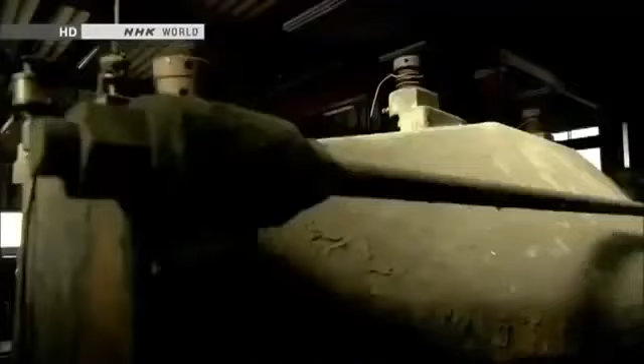In a workshop near Mount Fuji, a curious being has appeared. It's 3.8 meters tall and weighs 4 tons. It is a giant humanoid robot named Kuratas.

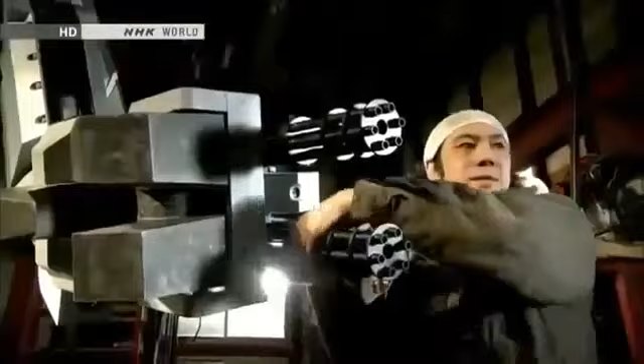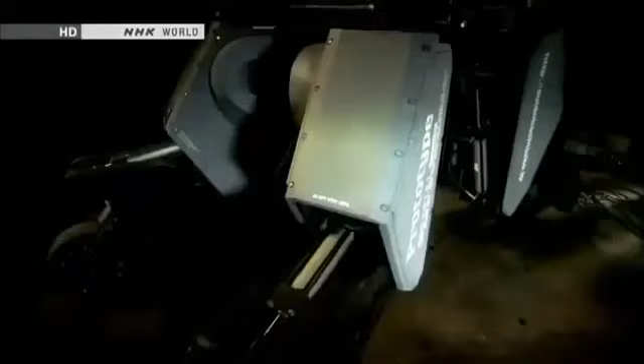Kuratas is a contemporary artist's creation. He holed up here for 2 years, building the robot with input from an expert. He calls Kuratas a work of art, but it's a sophisticated piece of machinery. A person seated inside can control the robot, move its limbs, and grab things. The artist says he was inspired by robots in science fiction tales and animation. That vision sustained him as he worked in solitude.

Things that were once unthinkable are becoming real. How will robots evolve? Well, military applications could be one option. They'll probably become more and more like humans. They could surpass us in strength and ability.

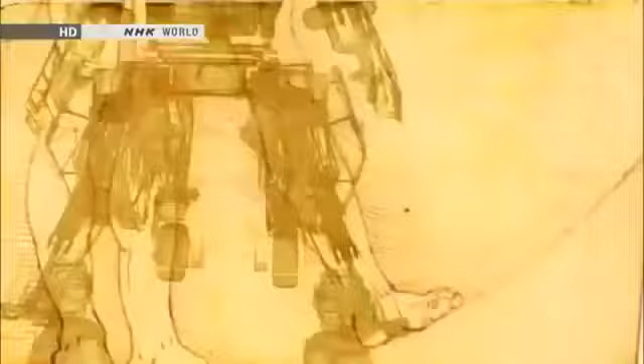People long dreamed of creating these extreme machines. Now, humanoid robots are here. They think like we do, move like we do, and even sacrifice themselves for us.

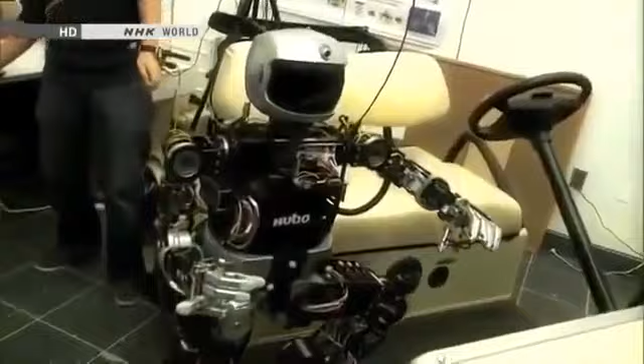We want our robot to change society, because robots must be useful. Electronics and computing, progress in vision systems, there are many pieces of it. We will see much more capability continue to grow.

Since the Industrial Revolution, people have entrusted some jobs to machines. But there may come a day when humanoid robots do much more complex jobs. Then, what will people do? You'll see more and more robots doing things in society, whether it's manufacturing, service applications, or home healthcare applications. The key will be to skillfully divide labor between humans and humanoid robots.

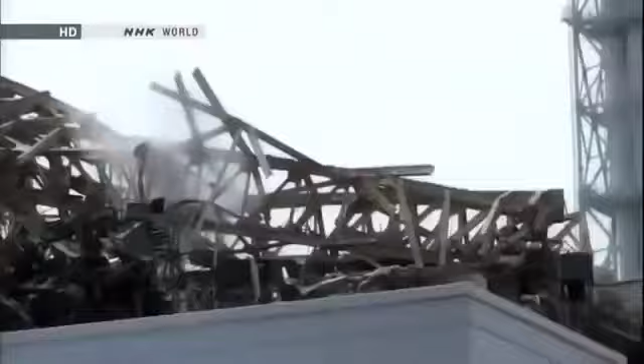The disaster that hit Japan in March 2011 accelerated efforts to develop robots with human traits. The Fukushima nuclear accident left people powerless. Robots can take over when things become dangerous.

They can plow through rubble, climb ladders, even make repairs. People are turning to humanoid robots to handle all of these tasks. We're eager to launch it soon to end the crisis. By joining forces, we can make a truly useful contribution. Only a humanoid could do it.

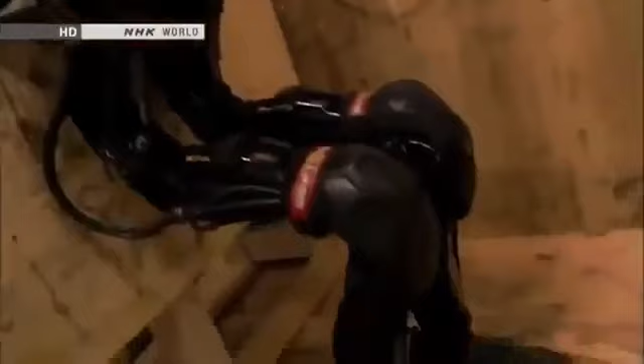The day will come when robots will really assist mankind. The nuclear disaster in Japan sparked explosive advances in humanoids at the front line of robotics development. This program explores the future that's fast approaching.

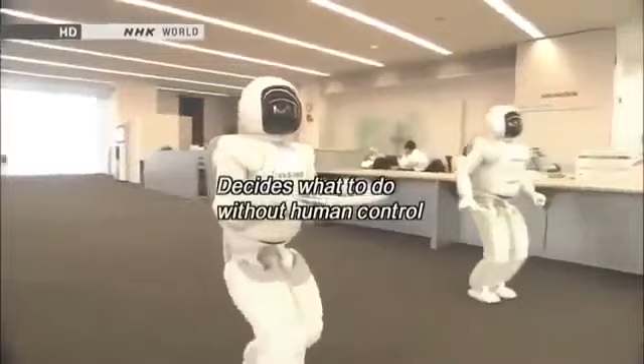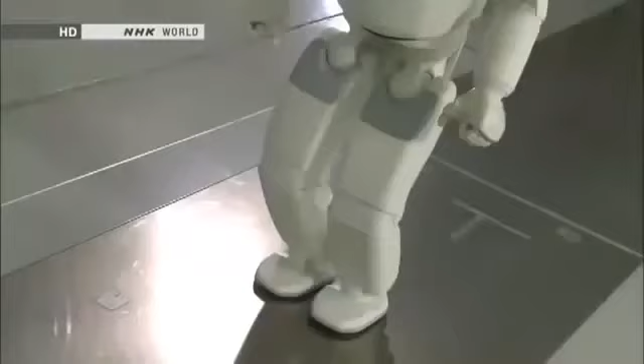Asimo was created by Honda's research and development subsidiary. We were allowed to film their top-secret robotics laboratory. Japan is a worldwide leader in the development of humanoid robots. Asimo is the country's crowning achievement. Engineers continue to make improvements.

Asimo's most innovative feature is its advanced intelligence. The robot can think and act on its own without human intervention. That's made possible by sensors that replicate our 5 senses. Asimo's head contains 8 microphones, which it uses to listen and engage in conversation.

2 cameras work as eyes. They can detect humans and use stored data to identify them. A facial recognition problem? I don't think so. Please cover your face.

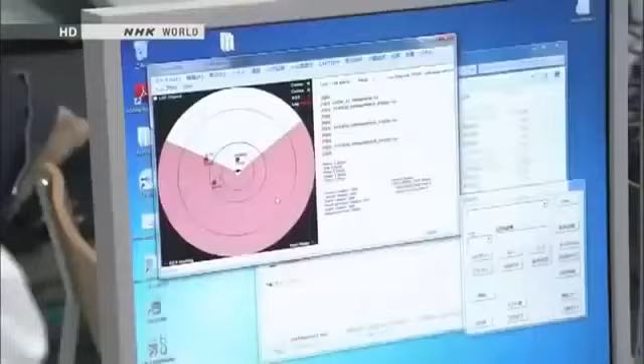Asimo's artificial intelligence analyzes a vast array of information. That's how it understands people's requests and takes appropriate actions.

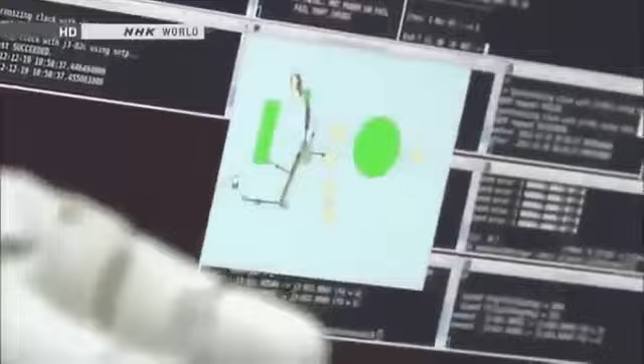Asimo also has a sophisticated sense of touch. Its fingers can make subtle movements, like a person's. Sensors are embedded in the fingertips, too. They can gauge the hardness of an object, like human fingers do.

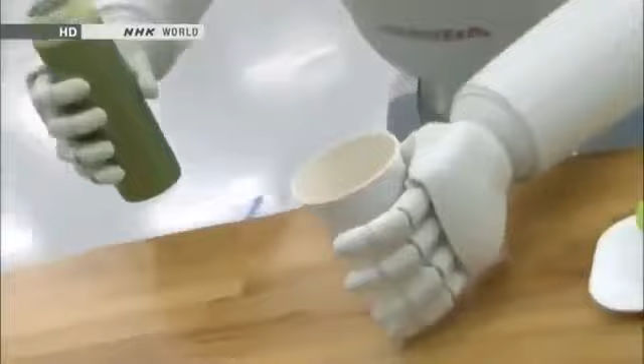Most robots use a fixed amount of strength to grab things. But Asimo exerts more power to open a tightly sealed water bottle and less when holding a paper cup. Its artificial intelligence uses information from the fingertip sensors to adjust the grip.

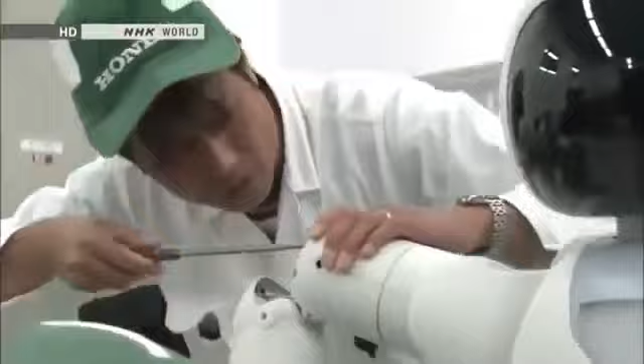The developer's ultimate goal is for Asimo to be a valuable partner that coexists with humans. The engineers who created Asimo all grew up watching animated shows about robots, such as Astro Boy, Doraemon, and Gundam. They dreamed of someday making their own.

Satoshi Shigemi is the development team's leader. He has been designing robots for the past 16 years.

From the beginning, we wanted to design a robot that could help people. To realize that dream, we're constantly asking ourselves, what kind of robot would be able to change society, make people happy, and make life easier for people around the world? Our idea is to create a robot that will change how people live. We're working through the technological issues, one by one, in order to reach that goal.

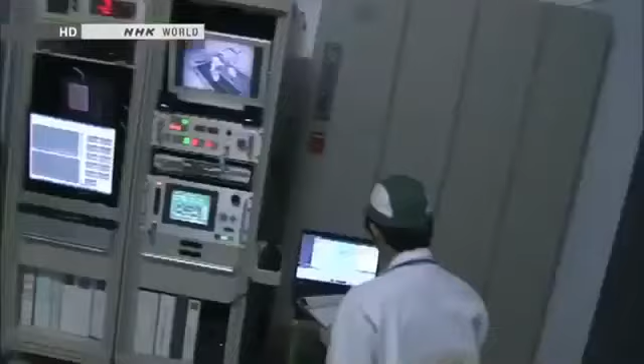Asimo's advanced physical capabilities are revolutionary. The robot can walk and run. It can reach speeds of up to 9 kilometers an hour.

For robots, walking is much easier than running. When running, both feet momentarily leave the ground. Balancing in mid-air is no easy task.

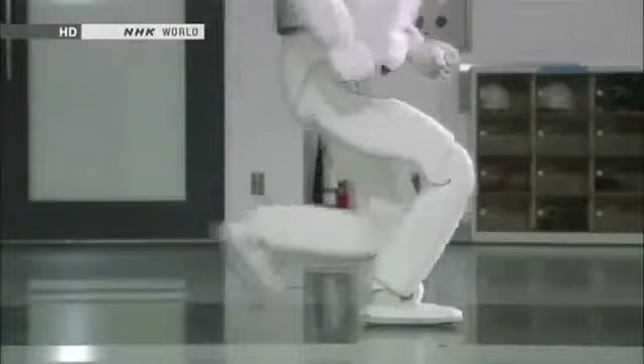Maintaining posture while jumping or floating in the air was a major technological breakthrough. Asimo leans its upper body slightly forward to maintain overall balance, going forward straight in the air. Sensors in Asimo's waist measure the robot's angle, and it leans slightly to compensate, forward or back, side to side. That's how it stays perfectly balanced in the air.

Asimo has been evolving ever since development began in 1986, much like a growing child.

But something happened that made researchers realize Asimo's real-world limitations. It was the accident at Tokyo Electric Power Company's Fukushima Daiichi nuclear plant. The damaged reactors released radioactive substances, making it difficult for humans to deal with the crisis. People needed something that could confront the dangers and bring the plant under control.

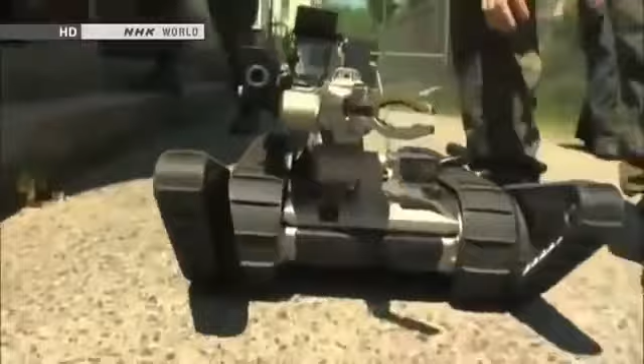Robots. Japanese officials sent a request for robots developed by the U.S. military. The robots were sent to Fukushima in April 2011. They recorded images inside the damaged reactors.

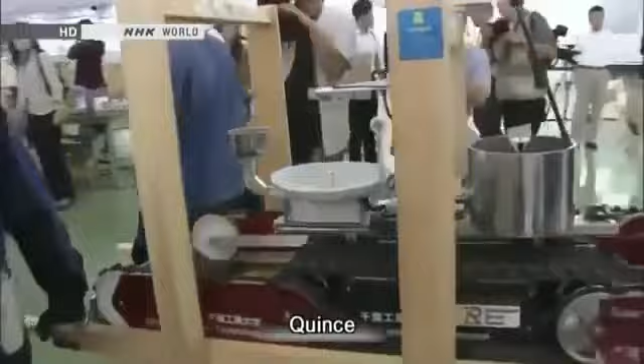Since then, a variety of Japanese robots have been enlisted as well. Robots have proven to be useful, but 2 years after the accident, they're only used for inspections. They're not able to do all the work of humans.

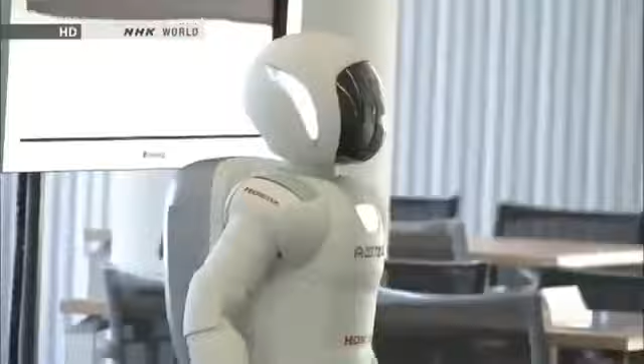What about Asimo? Right after the disaster, people flooded Honda with phone calls and emails asking the company to send Asimo to the Fukushima plant. But Asimo wasn't up to the task. It could move nimbly over an office floor and other flat surfaces, but large vertical gaps and obstacles were a different story.

We heard from many customers. We ourselves regretted that Asimo couldn't be of help. It was obvious that the Asimo we had built wasn't ready for real-life action. We realized right away that we needed to make something different, something new that could offer immediate assistance.

Honda wasted no time. Company officials offered to create a robot free of charge to assist TEPCO in the recovery. TEPCO accepted. Officials asked for a robot that could open or close valves inside the nuclear plant.

We wanted to flush out radioactive materials that remained in the pipes and bring down radiation levels in the facility. That was our first goal. Unless we opened or closed the valves, the area would remain highly radioactive, and that would prevent workers from entering the facility and impact the entire decommissioning schedule.

How many valves are there? Each unit has from several thousand to tens of thousands of them.

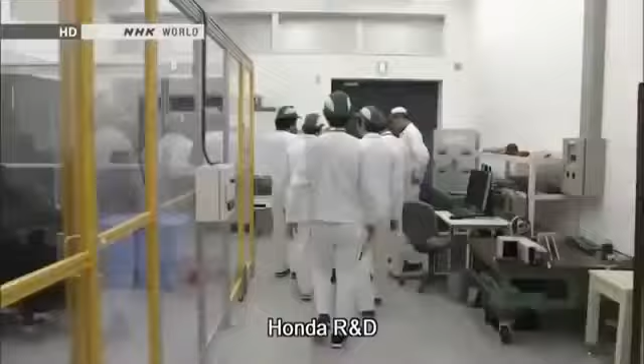In July 2011, 4 months after the accident, Honda began designing a robot for use at the nuclear plant. Members of the Asimo team were put in charge of the project. A humanoid robot would take too long to build, so engineers focused on making a robot specifically for operating valves.

Asimo was crucial to their efforts. Its ankles employ advanced balancing technology. Developers reasoned that using it would allow the new robot to work inside rubble-filled reactor buildings.

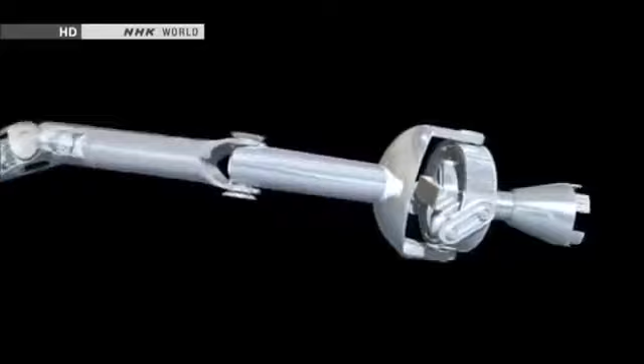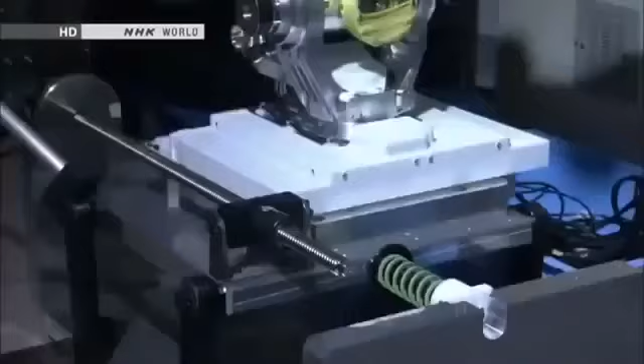The team worked exceptionally fast, completing a prototype in just 4 months. They turned Asimo's leg into an arm for operating the valves. Even when the base moves, the arm remains steady. So far, so good.

Officials from TEPCO evaluated the prototype at the National Institute of Advanced Industrial Science and Technology. The government-backed group for cutting-edge research contributed to the development effort.

A TEPCO official couldn't take his eyes off the robot's movements. We may be quite demanding. That's okay. We might be quite direct. The test is designed to replicate conditions inside the nuclear plant.

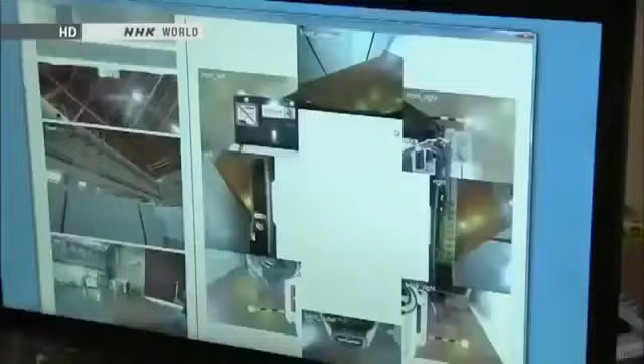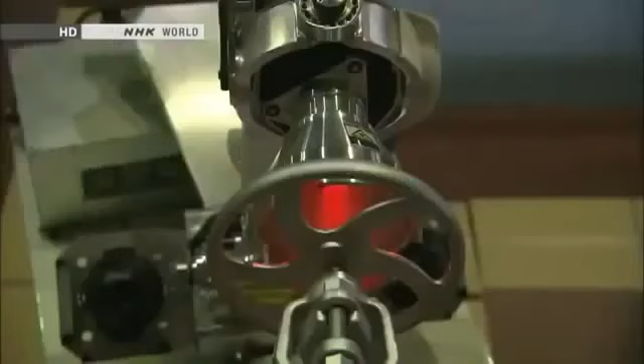The robotic arm is remote controlled. Testers send the arm toward one of the valves. There are a number of unknowns, including the condition of the valves. They may have rusted since the accident. A valve might break if the robot applies too much force, or it might not budge at all.

The robot uses just the right amount of force and turns the valve on the first try. It's passed the test. This robot can do more than inspections. It could help in the recovery effort.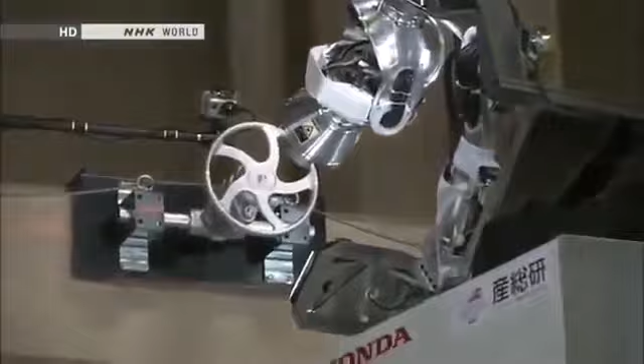From what we've seen, the robot seems near perfect. We want to use it as soon as the need arises. It's important that we quickly do what we can to make that possible.

The Fukushima accident also encouraged U.S. developers to design emergency response robots. Department of Defense officials have spearheaded the effort. Before, they had shown little interest in humanoid robots. Now, they view them as vital for disaster response. The architect of the new strategy is Gill Pratt of DARPA. He oversees funding for leading-edge research at the Department of Defense.

There are many aspects of disaster response in Fukushima that inspire people in robotics to work on new capabilities. If they were able to take action during those first 24 hours, then the first reactor maybe would not have blown up in an environment that is too dangerous for a person to do. What's important to us is that the robot is compatible with human environments, compatible with human tools, and also compatible with human operators without special training.

As a result of that, the easiest form that comes to mind is the human form. DARPA is backing the development of a humanoid robot for catastrophes, such as nuclear power plant accidents.

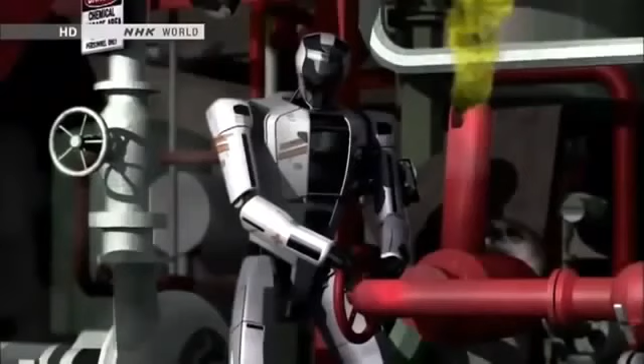Why the sudden interest in humanoid robots? Traveling over debris, prying open valves, using tools for repairs. Performing multiple tasks like these is impossible for specialized robots. Crises also require robots that can navigate doors and stairs. Humanoid robots are ideally suited for such situations.

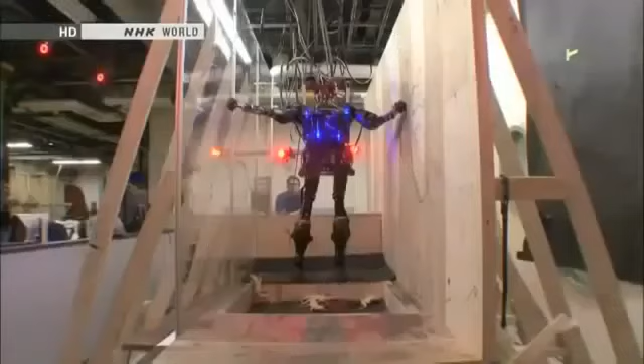Tests of this prototype were going smoothly. It can easily climb stairs and jump from a height of nearly 1 meter. It can negotiate obstacles using its arms and legs. It can already handle more demanding environments than Asimo can.

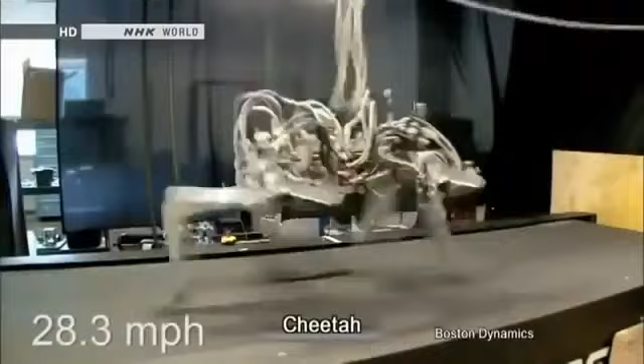Atlas is loaded with technologies originally designed for military robots. A quadruped robot called Cheetah can race through a battlefield at 45 kilometers an hour. LS-3 is for transport. It can carry heavy supplies for soldiers.

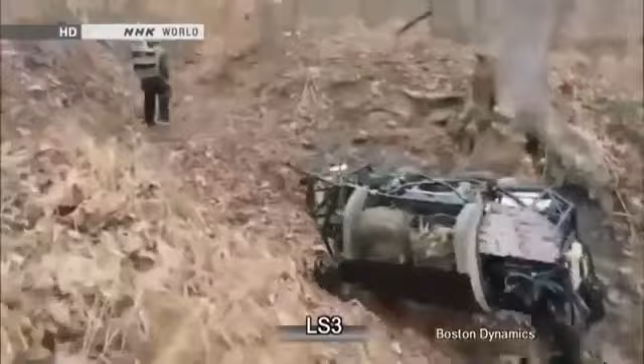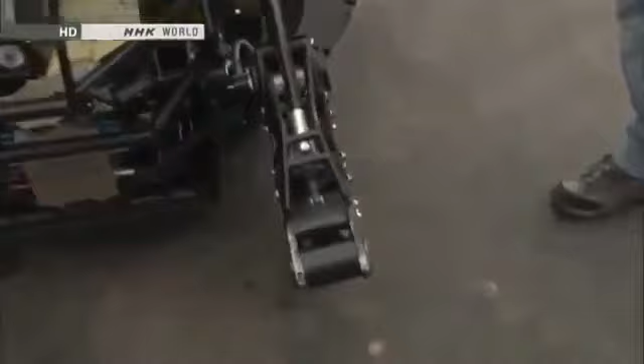The ferocious-looking robot gets its strength from a powerful hydraulic drive system. A hydraulic device can be small, yet quite strong. The black cables convey hydraulic power to the legs. That generates the brute force required for harsh conditions on the battlefield.

A web of hydraulic cables covers Atlas's body. They form a muscular suit of armor for clearing debris.

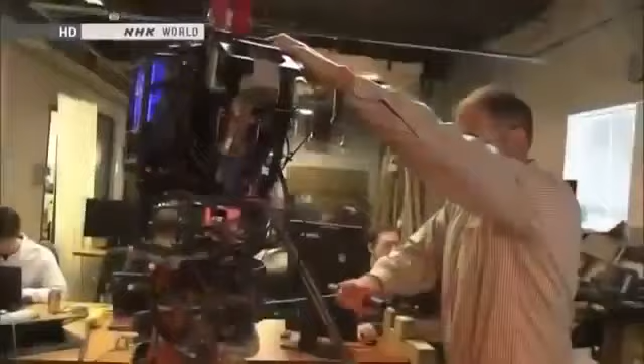Another important technology comes from military robot engineering. This machine's joints have a wide range of motion. They allow for flexibility that humans can't achieve. Atlas's joints are capable of moving in 28 different ways. Atlas can crawl through narrow spaces and withstand sudden shocks.

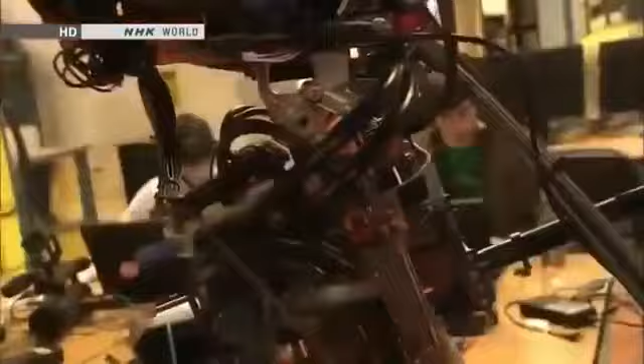But then we have the knee. This has 3 in the hip, just like us. This way, and then this way. I am very impressed with the number of degrees of freedom. It will be able to do these human-compatible tasks without a lot of the limitations that other robots have.

Engineers will combine Atlas's rugged body with sophisticated artificial intelligence that's almost near completion. They aim to complete the robot by December of next year.

One reason you see humanoid robots is because there's some people working who are really interested in robots as an entertainment thing or as a performance thing. I think that's different. We're much more interested in basic capabilities for emergency response, rescue. So I don't think Asimo has been designed to do those things yet.

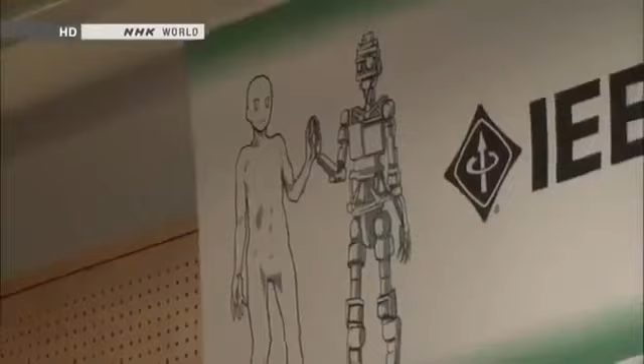U.S. engineers stepped up their efforts to develop humanoid robots after the nuclear accident in Japan. Japanese researchers are embracing the same mission. In November 2012, robot engineers from around the world gathered in Osaka for an international conference on humanoids.

Gill Pratt from DARPA was one of the participants. He came to invite engineers to join a project sponsored by the U.S. Defense Department. Okay, March 11th.

After 24 hours, if only a robot had been there to go and open that valve, the entire disaster could have been averted. But we didn't have one. And furthermore, we didn't have anyone that could do the job. So shortly afterwards, we actually started planning the DARPA Robotics Challenge.

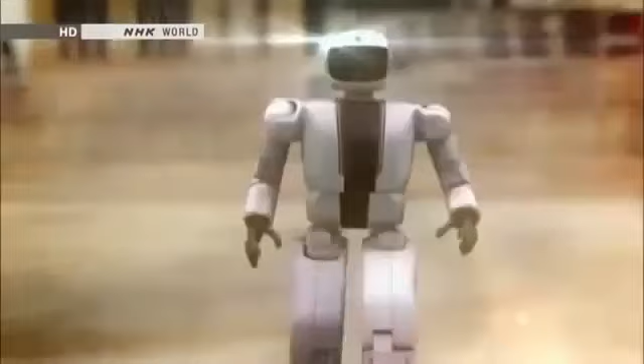The challenge consists of 8 tasks: driving a vehicle to approach a disaster site, walking over rubble, removing obstacles, opening doors, using tools to break down walls, climbing ladders, turning valves, and making repairs.

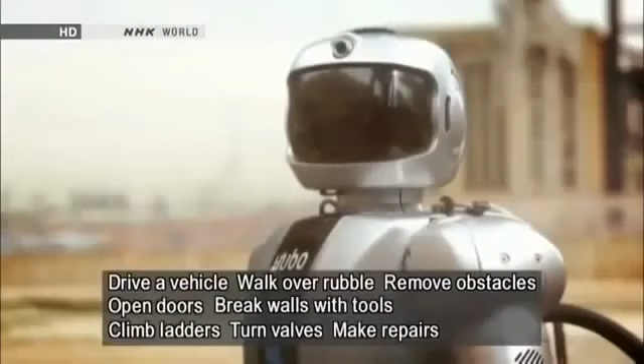A single robot must complete all 8 tasks. The development period is 2 years. DARPA will provide contestants with funding of up to $4 million.

DARPA has received over 100 proposals from research groups worldwide. They include renowned organizations like NASA and MIT. Japan is at the forefront of humanoid robotics engineering, yet its researchers hesitated to throw their hats into the ring.

So actually, to me, it's difficult not to see that some of the results of the DRC are going to be used to advance, as you say, advanced military technology. The DRC is about developing robots that I believe wholeheartedly are completely impractical for military purposes, for offensive military purposes. Will the technology that we come up with find its way into military systems? Probably yes. But I guarantee you that if you work on a robot for healthcare, there's a chance that that technology will also find its way into military systems.

The members of one Japanese research institution wanted to take part in the competition.

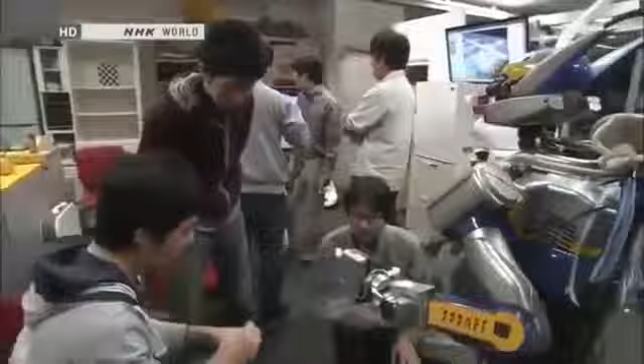Three researchers made a decision. They told the university they were leaving. Then, they decided to set up a venture company and enter the DARPA Robotics Challenge. They couldn't shake the feeling that they should leave their quiet university lab and help resolve the nuclear crisis.

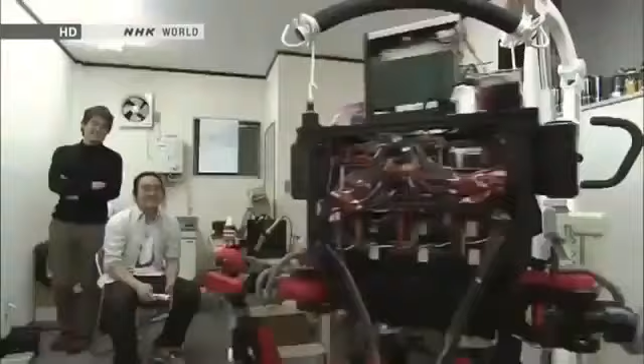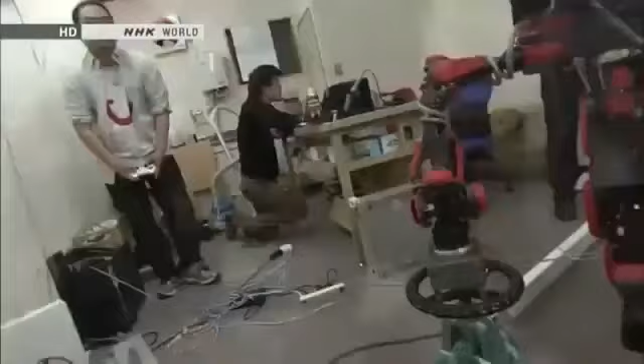Six months after launching their venture, the team had just completed a prototype with help from university graduates. Its long arms can exert 10 times more force than those of conventional humanoid robots. It can easily turn a valve that's too tight for a person to turn with one hand. The strong force comes from a large electric current that pushes the motors to their maximum limits.

A reddish fluid circulates through the robot's body. The fluid serves as a coolant that keeps the motors from overheating. This cooling system should enable the robot to perform hours of grueling work at disaster sites.

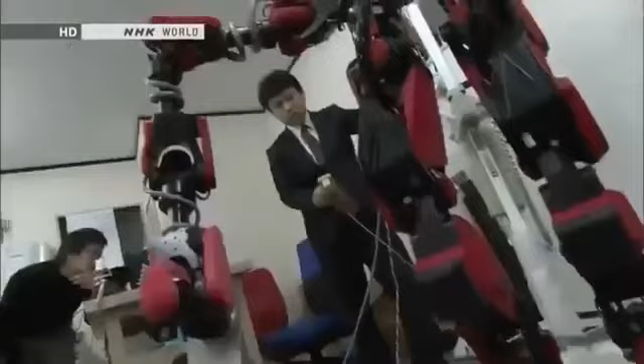The time has now come for the developers to apply their years of research to the real world. A nuclear crisis has happened here in Japan. Radiation is escaping. Researchers in every field must wonder at least once if the technology they've been working on could help resolve the crisis. By joining forces, we can make a truly useful contribution. It's with this in mind that we decided to enter the competition.

One country is quickly catching up with Japan in humanoid robotics: South Korea. KAIST is a government-funded lab for the advancement of science and technology. Researchers there were among the first to express interest in DARPA's Robotics Challenge.

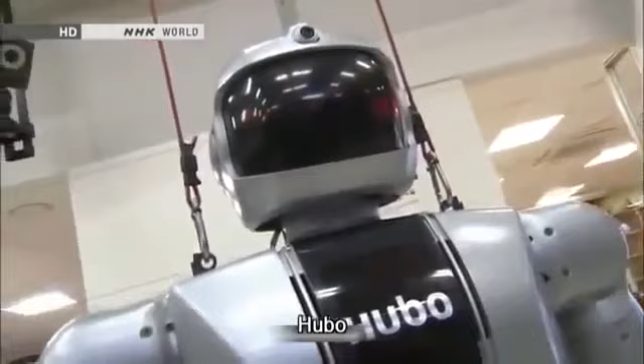This humanoid robot is called Hubo. It's modeled on Asimo, which Honda spent 14 years developing, but Hubo was built in just 5 years. Hubo deftly manipulates its hands, and it's also good at dancing. Its moves look just like Asimo's.

Hubo has been undergoing a major upgrade ahead of the competition. It can now bend backward at the waist while walking to handle all kinds of environments, and it can quickly pick up tools. The tests were going well.

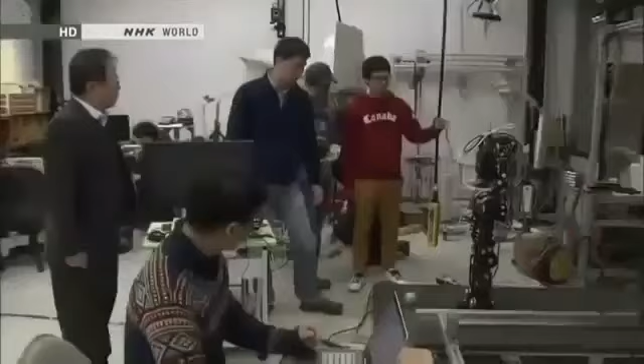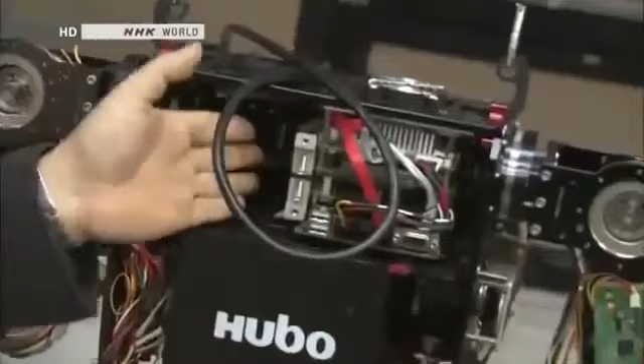People have always compared Hubo to Asimo. Engineers now had a strategy to get ahead of the Japanese developers: they decided to publish certain details about Hubo's design and pursue joint development with researchers at other institutions. One could say that this space inside Hubo's chest captures the heart of their thinking. It's empty now, but this is where artificial intelligence will be installed, and it's removable.

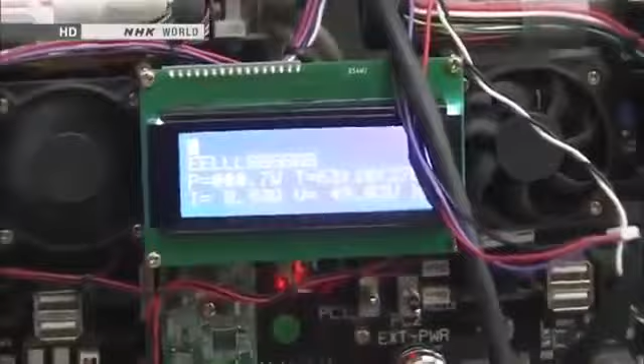Hubo does not yet possess artificial intelligence. Its motions are as sophisticated as Asimo's, but Hubo's movements are all pre-programmed. U.S. universities that lead research into artificial intelligence will develop a brain for Hubo. The stage has been set for a joint U.S.-South Korean team to compete in the DARPA Robotics Challenge.

Sharing is the key to making technological advancements. That's true in South Korea and in other places too. Research shouldn't be confined to one place. People developing humanoid robots elsewhere are too close-minded.

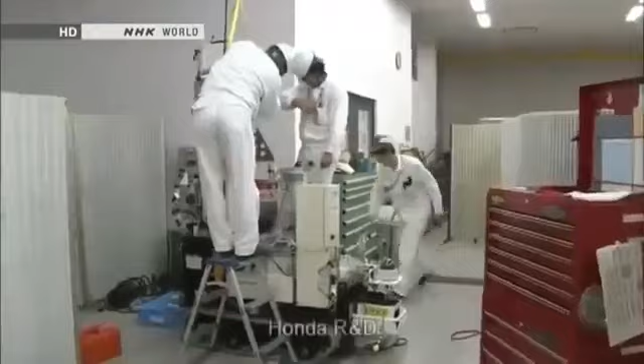Researchers at Honda were also invited to enter DARPA's competition, but they declined. Their energies were focused on designing a robot to tackle Japan's nuclear crisis.

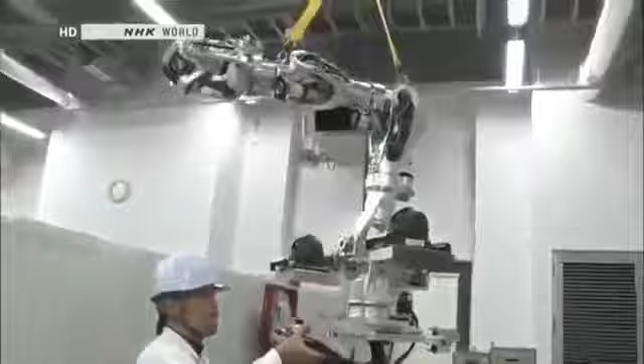Nearly a year has passed since Honda's robotic arm passed evaluation tests, but the device has yet to be deployed to the nuclear disaster site. That's because officials at TEPCO requested a change in specifications. Engineers have replaced the valve-turning hand at the end of the arm with a camera.

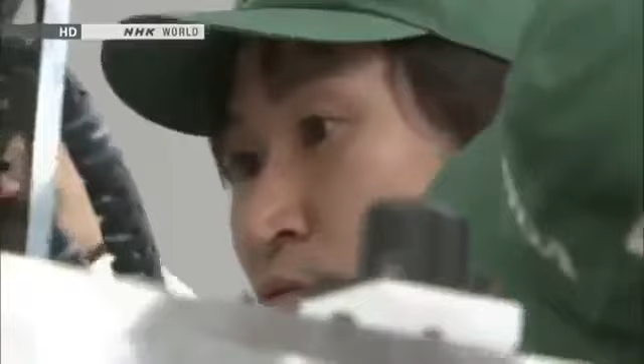TEPCO had changed its plan. Officials decided to put priority on assessing conditions inside the plant's facilities. They said it was too early to have robots work on valves. There wasn't even a recovery plan in place when we were working out the valve manipulation tasks.

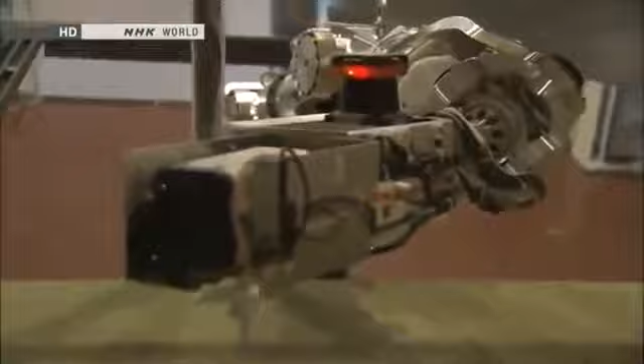The robotic arm will soon be sent to the accident site. It will provide the first images filmed from high up. But the robotic arm was not the end of Honda's efforts. Its engineers had another secret mission.

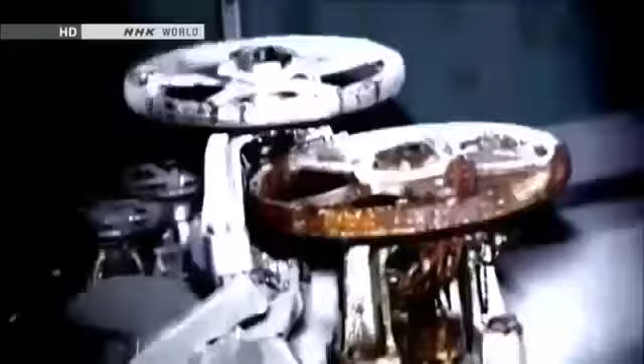They would develop a new humanoid robot, an updated version of Asimo for use in disasters. The site where the Fukushima disaster took place is dark and off-limits to humans. Only a humanoid robot with both intelligence and motor skills could climb over the debris, get to the accident site, and perform the work of people. In other words, a robot like Asimo. Let's use our skills to make a humanoid robot that can tackle disasters. Asimo's engineers were united by this idea. The robot they envisioned would not only walk, but also use its arms to crawl. It would use every means possible to reach its destination. A dramatic update would be necessary.

A disaster reduction robot would be useless if it couldn't get to the site. It's important to get to the scene no matter what. Disasters create all kinds of debris that crumbles easily or breaks when stepped on. It's because it's dangerous that robots replace humans. That's what makes them valuable. A robot that couldn't get to the scene would be totally useless.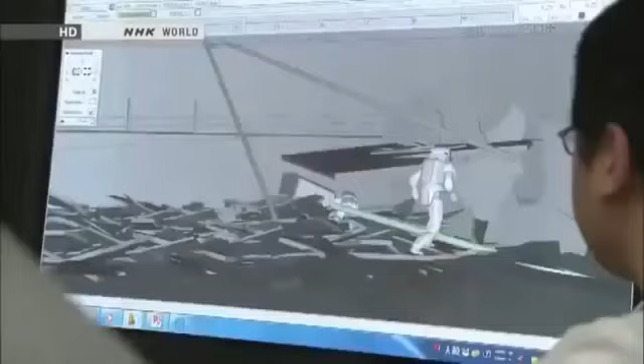Honda's engineers began developing robots in 1986 with the goal of making people happy. 27 years of research is now being put to the test. As we saw in the Fukushima Daiichi crisis, the bottom line is that robots can stand in for humans in places that we can't go to or that are too dangerous. I am committed to delivering what's needed, when needed, in the shortest amount of time.

The accident in Fukushima spurred the development of humanoid robots around the world. The disaster also prompted people to question the roles of humans.

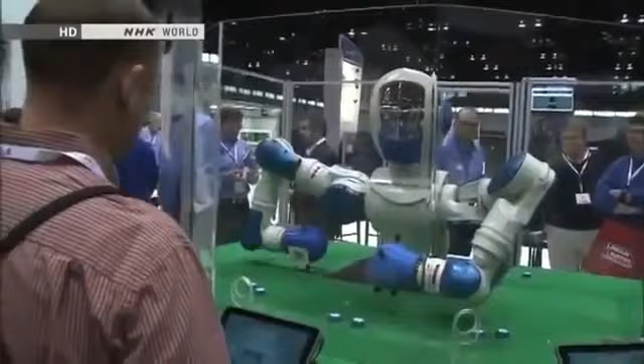One of the largest trade fairs featuring industrial robots took place in January. Global manufacturers displayed their latest models. Companies are developing more and more two-armed humanoids for industrial use.

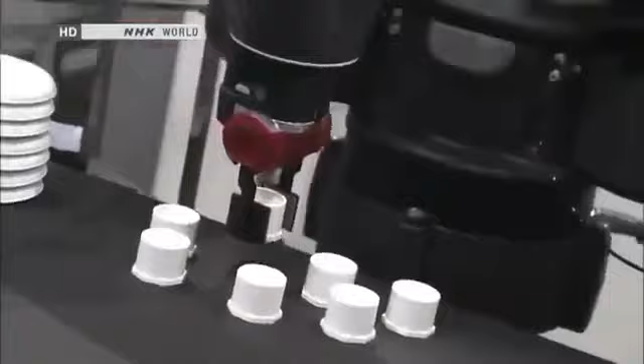One new product at the event caught a lot of people's attention. Baxter was created by the inventor of a best-selling cleaning robot. It's equipped with sophisticated artificial intelligence. Baxter is designed to work side by side with people in factories and other settings.

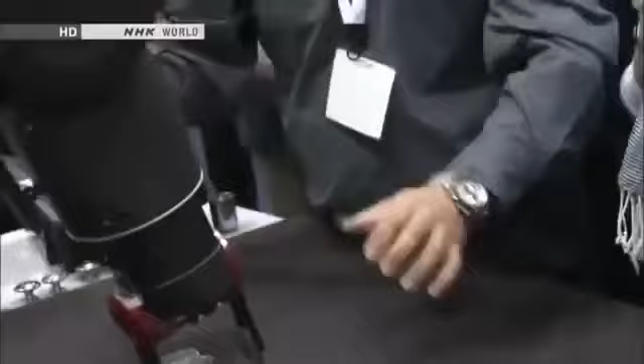The robot's most unusual feature is its ability to master a task in a matter of 5 minutes. All that's required is step-by-step manual instruction. No complicated programming is needed. Let's pick up this part. So you bring the arm to the part. Yep, just like that. So we have the part. Close the grasp.

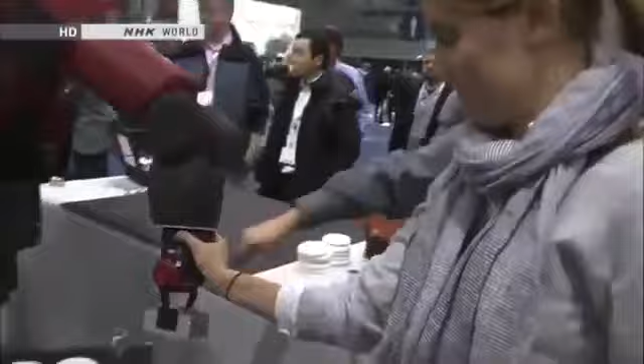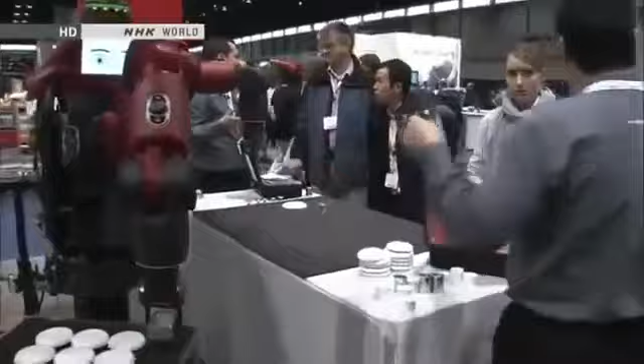The expression on the face on the LCD screen shows whether or not the robot has understood the task.

Baxter costs $22,000, a bargain for a humanoid robot. The maker says buyers can recoup their investment in several months and slash labor costs.

I'm very impressed with it. I work for a small manufacturing company, and we have some older employees who are looking to retire. There's some tasks that Baxter could do for us very effectively, plus it would be cheaper than employing a person. It's not going to get tired, it's not going to need to stop. It'll keep running while everybody else is taking their lunch.

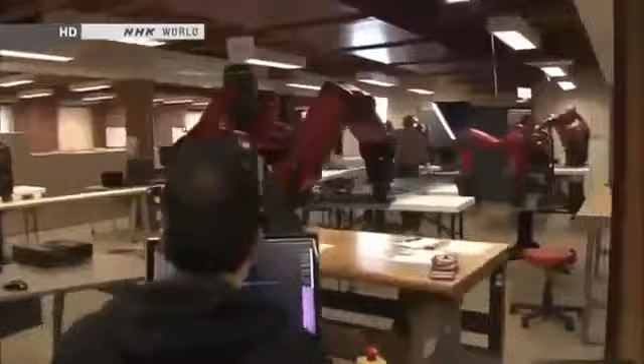The Boston-based manufacturer has a flood of back orders. Officials say someday Baxter will work at places like coffee shops, taking orders and grilling burgers. Eventually, they expect to have 500,000 U.S. customers.

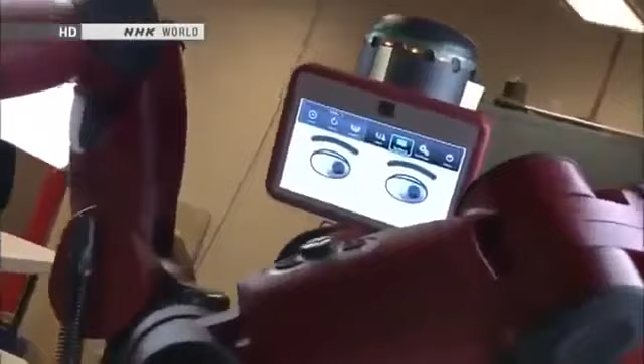Today we're focused on manufacturing, and there's a very big opportunity in manufacturing. But there's lots of other places that a robot like Baxter could go. We had the Industrial Revolution at the turn of the last century. We've just gone through the computer revolution, effectively at the turn of the most recent end of the century. We are now into the robot revolution.

Will people and robots someday compete for jobs?

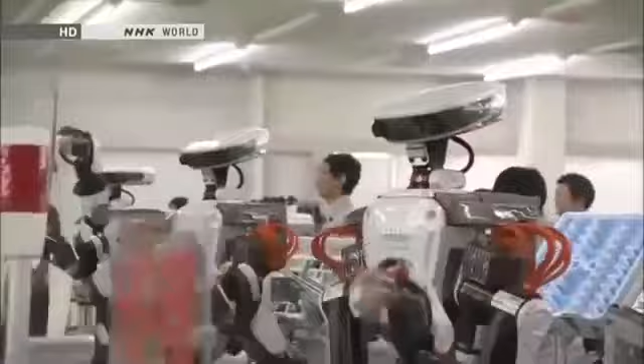At 8:30 one morning, a group of new employees takes part in daily morning exercises. They are 13 humanoid workers called Next Stage. This company began using the robots in earnest last year. They have 2 eyes and are just like humans. They're cute!

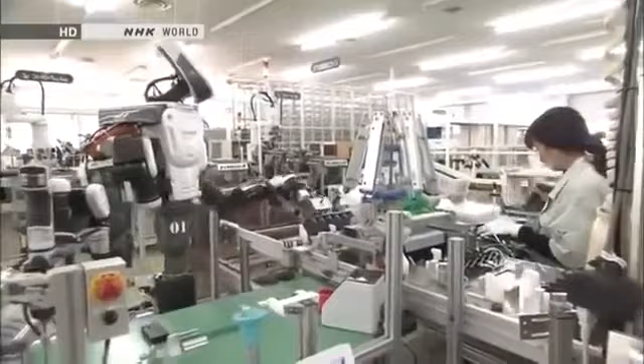This factory manufactures money sorting machines for cash registers. The humanoids work on a production line that was previously manned entirely by humans. The robot visually confirms the parts set in place by a human worker. Then it begins its task.